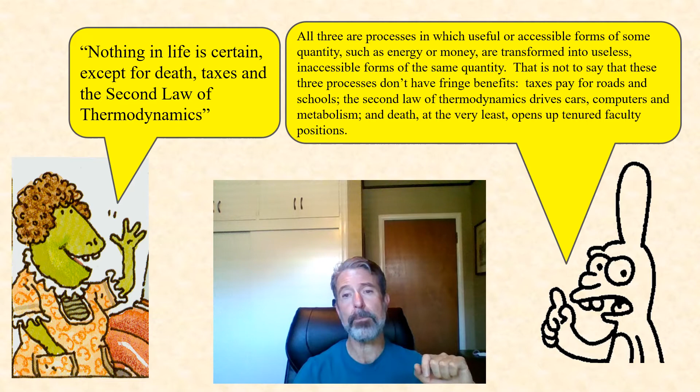So like I said, we will start by reviewing the first law of thermodynamics. Remember, in a previous lecture we said the first law is really nothing more than a restatement of the law of conservation of energy, for thermodynamic systems.

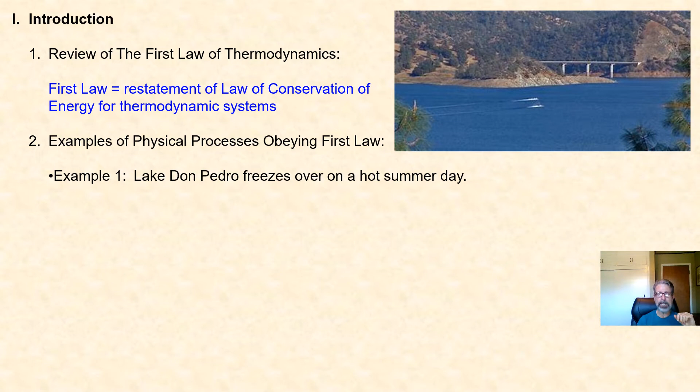Let's take a look at some examples of physical processes that obey the first law of thermodynamics: like Lake Don Pedro freezing over on a hot summer day, or a test tube that you drop spontaneously reassembling itself and rising upwards into your hand unbroken. Or how about this one: your messy bedroom spontaneously rearranges itself into a paragon of order.

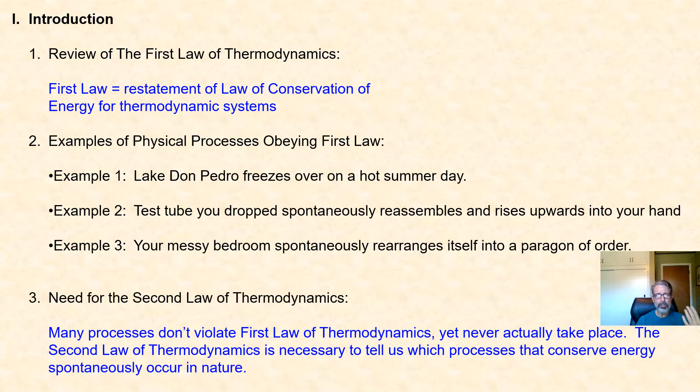So you're starting to see a little bit of the problem, and why we need the second law of thermodynamics. None of these processes described in these three examples violate the first law. They are all consistent with it in that energy would be conserved in every single one of those processes, yet they never actually take place. The second law of thermodynamics is necessary to tell us which processes that conserve energy spontaneously occur in nature.

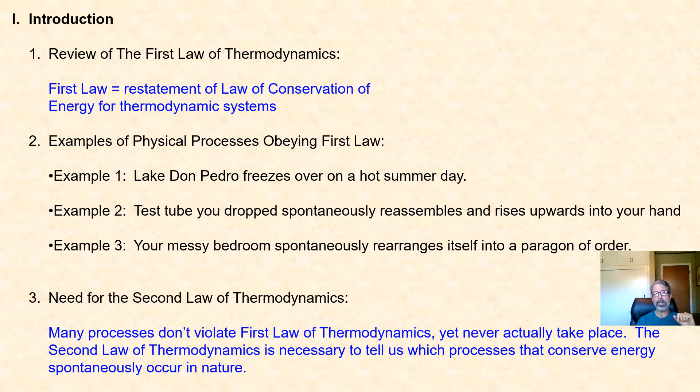As I was saying, one of the ways in which the second law has been stated, one of the first ways, was in terms of heat engines. Heat engines in the mid-1800s were a prime focus, kind of as a precursor to the Industrial Revolution. A lot of study was done on them, including from a scientific perspective.

So a heat engine, really by definition, is any device that transforms internal energy or heat into mechanical energy. Said simpler, any device that converts heat into work.

Some examples of heat engines: one we looked at was the thermoelectric converter. If you think about it, this is a simple heat engine that uses the flow of heat from a high temperature reservoir or cup to a low temperature reservoir, and in the process is able to get some work done, which you saw on the fan motor.

Obviously, the internal combustion engine of an automobile is the most common and important example of a heat engine in contemporary society, and we will talk more about those later in this video. And a steam engine, which was another big mover and shaker in the Industrial Revolution, is a device that can convert hot steam into mechanical energy.

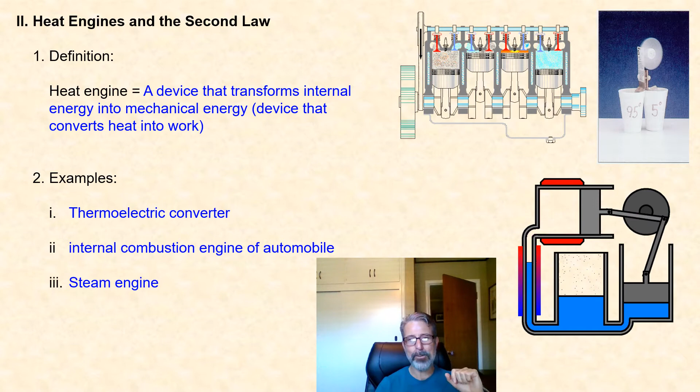So in order to formulate a statement of the second law of thermodynamics in terms of heat engines, we need to start by discussing the thermodynamics of the heat engine. In other words, we need to take a look at what is going on inside of any heat engine in terms of energy flow and work being produced.

Now there are many different forms of heat engines, and I'm showing you an example over here in the right-hand corner of your screen. Whether you're talking about an internal combustion engine, a thermoelectric converter, or a steam engine, the mechanical workings may be quite complicated and different from engine to engine, but the thermodynamics is all the same.

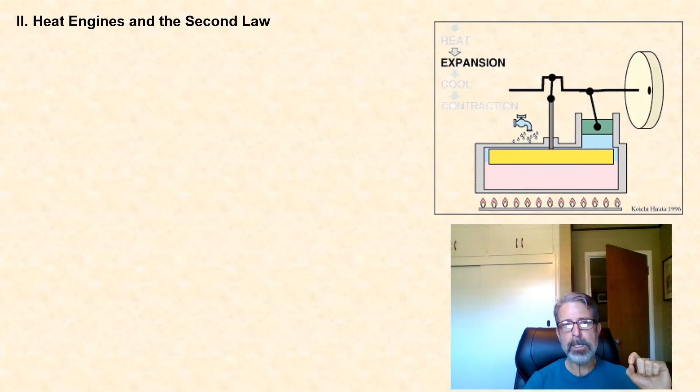So let's start there. Now, if a heat engine is a device that can convert heat into useful work, then we know that heat is really the flow of internal energy. So in order for heat to flow, there must be a temperature gradient.

So what I'm showing you here represents your high temperature reservoir, and this represents your low temperature reservoir. There must be a temperature gradient that exists in order for heat to flow. T sub H represents the high temperature of that reservoir, and T sub C represents the low, or cold, temperature of your lower temperature reservoir.

Now, what we'll put here, this circle represents a system. Whether it's an internal combustion engine, a steam engine, thermoelectric converter, or the silly contraption you see here on the screen, it just represents any heat engine. It represents a system in general.

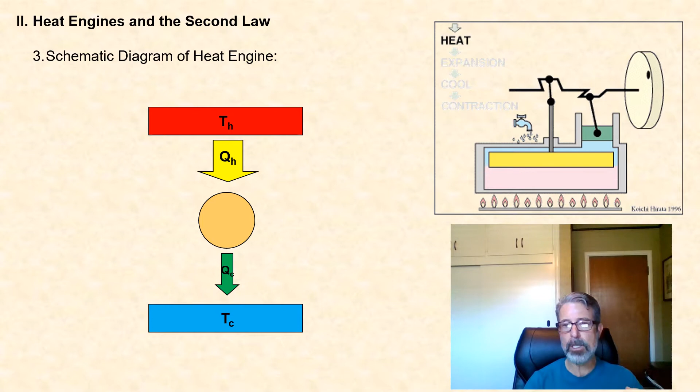Schematically, we can say that in order for any heat engine to work, you must have heat that flows from your high temperature reservoir into your system. This arrow shows Q sub H, representing the amount of heat leaving the high temperature reservoir. Q sub C represents the amount of heat entering the low temperature reservoir. So this is nothing more than heat flow. Notice here that the amount of heat entering the low temperature reservoir is less - that arrow is a little thinner than the amount of heat leaving the high temperature reservoir. Why? Because some of that heat gets converted into doing useful work.

So while this does not tell you how to construct a heat engine, this schematic diagram is true for all heat engines, because this is what they do. They capitalize or exploit the flow of heat from a high temperature reservoir to a low temperature reservoir, and in the process are able to get a certain amount of useful work done.

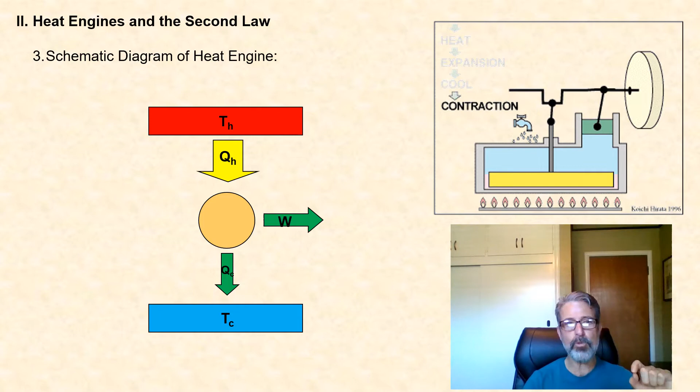So in this slide, we will take a look at the thermodynamics involved in a cyclic process. By cyclic process, we mean any process that begins and ends in the same thermodynamic state. Now, if you look at a thermodynamic process that begins and ends in the same thermodynamic state, when we look at the change in internal energy for any cyclic process, remember that internal energy is a state function, which means it only depends upon the current state of the system. So if our initial and final state are the same state, then by definition there is no change in internal energy for this cycle or cyclic process.

So we want to take a look at the work that gets done in a cyclic process and try to understand something general about the work done for any cyclic process. In order to do that, we'll take a look at a specific example - a particularly easy cycle where we have two isobaric processes as well as two isovolumetric processes, and we want to calculate the net or total work done for each process as well as for the entire cycle.

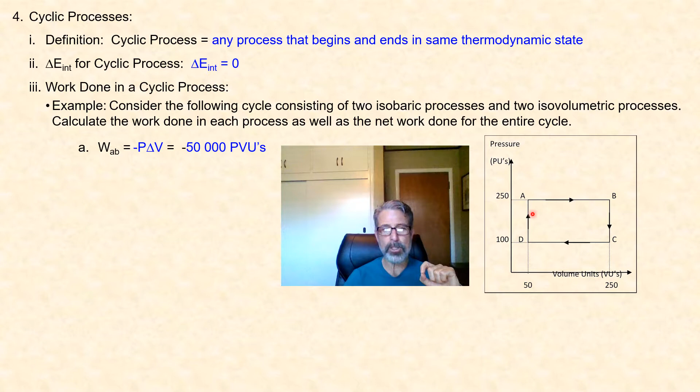So in order to calculate the work, we know two ways. The work done for any process is simply the area under the PV diagram, but in the special case of the isobaric process, the work done on the system is minus the integral of P dV, and since pressure is constant, it's just minus P delta V. From A to B, we have a constant pressure of 250 pressure units. The change in volume, we're going from 50 to 250 volume units. So 250 times 200 gives us an amount of work equal to minus 50,000 pressure volume units.

You can see very clearly that there is no area under the graph from B to C - delta V is 0. There is no change in volume, so there is no work done for that part of the cycle. Going from C back to D, this isobaric compression, the pressure is only 100 pressure units.

Once again, we're going from 250 to 50, so we have a change in volume that is negative 200, times 100 gives us 20,000 pressure volume units. So minus PdV is 20,000.

Once again, going from D to A, there was no change in volume, so there was no work done there. And when we calculate the net or total work done, by adding up the work done in each of these 4 cycles, minus 50,000 plus 20,000 gives us a total work done of negative 30,000 pressure volume units.

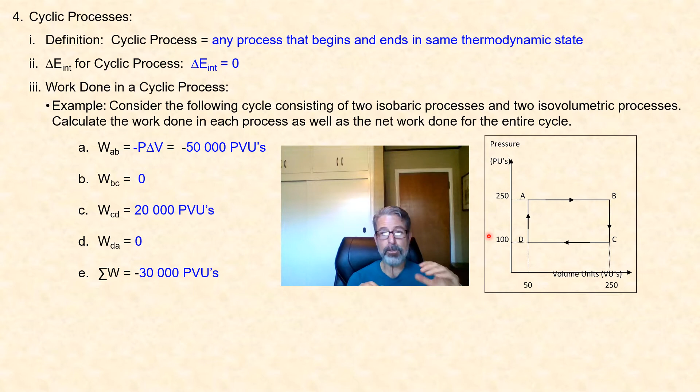So that is done by finding the work done for each of the cycles and then adding up the work terms. But I want to show you here that the net or total work done by the system is simply the area enclosed on this PV diagram.

Notice here, this is the work done by the system on the environment. Whereas the work we're finding here, this is the work that is done on the system by the environment, and that's what that negative sign is all about.

So the area enclosed in this PV diagram is really just the area of this rectangle here, which we can simply find. That's one of the reasons why we looked at these simple processes, because it's an easy area to calculate. So the length of that rectangle times the width.

So our length here is going to be 250 minus 50. Our width, or I guess height, you might call it, is 250 minus 100. And the length times the width gives us 30,000 pressure volume units.

Notice that this is opposite in sign from our answer here, because this is the net work done on the system, that's why we have a negative sign. This is the net work done by the system, which we just showed is exactly equal to the area enclosed on our PV diagram.

General principle here we learned by solving this specific problem. So why, you may be wondering, are we talking about cyclic processes?

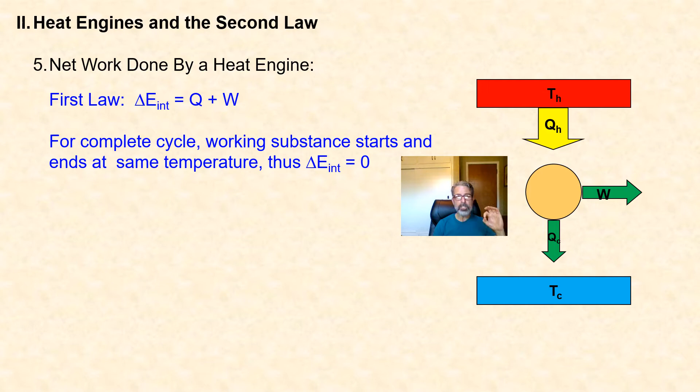Well, it turns out that when we talk about a heat engine, regardless of the type, it is an example of a cyclic process. Because, for a complete cycle, the working substance starts and ends at the same temperature. In which case, we can say that the change in internal energy is 0 for this cyclic process.

You also recall that we said that the internal energy for an ideal gas is directly related to temperature. So if we have a system that begins and ends at the same temperature, for an ideal gas at least, there is no change in internal energy for that system, for that reason as well.

So when we apply the first law of thermodynamics to a heat engine, then we get 0 for the change in internal energy, and we find out that the work that is done on the system is the opposite of the net heat that is added to the system.

When you take a look at your schematic diagram over here, you can see that the net heat added to the system - remember your system is taking in an amount of heat QH from the high temperature reservoir and expelling an amount QC to the low temperature reservoir.

So given that, the net or total heat that gets added to your system is just the difference between those two heats, that is QH minus QC. In which case, we can say that the work that is done on the system is the opposite of QH minus QC.

And you remember me telling you a long time ago that the way the first law of thermodynamics was initially stated, it was stated as a result of work that was done on heat engines, in which case there was a sign when we talked about the first law - we stated it as Q minus W, because W was defined to be the work done by the system, not on the system. In fact, your textbook, until about 5 years ago, stated the first law of thermodynamics this way.

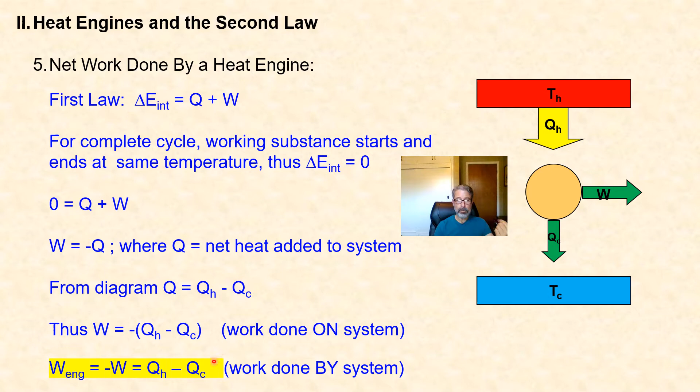So we will very often, when we talk about the second law of thermodynamics in terms of heat engines, put here work, engine, that this is the work that is done by the system, because that's what heat engines are used for. They're used to do useful work, to convert heat into useful work. So the work that you get out of your engine is a positive number, because it is work that the engine can do on the environment. It is simply the difference between the heat added from the high temperature reservoir and the heat expelled to the low temperature reservoir.

So how do you measure the efficiency of a heat engine? Before we talk about heat engines specifically, let's just talk about the efficiency of any machine. A machine is giving you some quantity out. In our case, for a heat engine, it's useful work. But regardless of the machine you're talking about, you put something into the machine, you get something out.

Efficiency in general will be a measure of what you get out compared to what you put in. So when we talk about a heat engine, it's work and energy that we're talking about. We can talk about the efficiency of a heat engine as being a measure of the useful work that you get out of your engine, done by the system on the environment, compared to the amount of heat, the net heat that gets added to your system. That's your input.

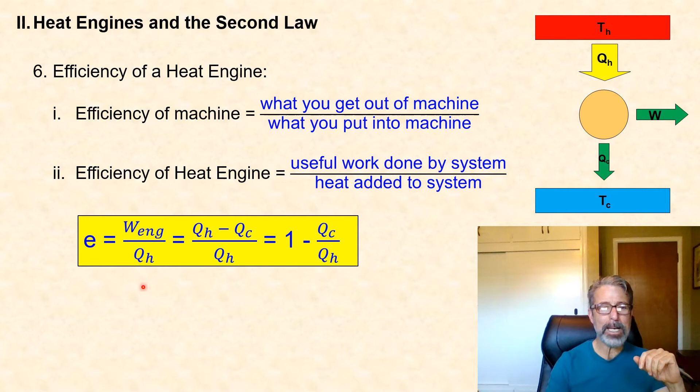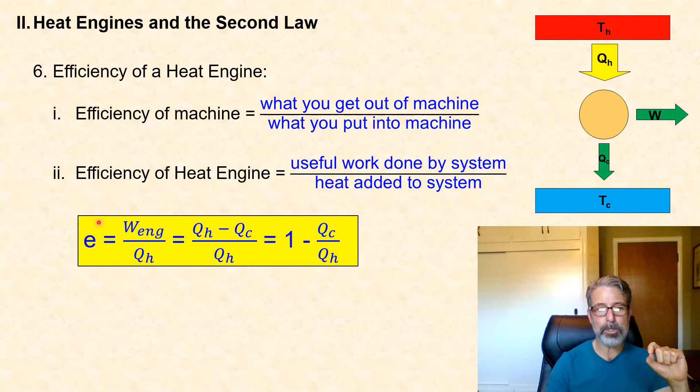Since we have expressions derived for this previously, remember we said that the work done by the system on the environment, the work you get out of your engine, is just the difference between the amount of heat added from the high temperature reservoir and the amount of heat expelled to the low temperature reservoir. The heat that gets added to the system is Q high. When we simplify this, Q high minus QC over Q high, we can write it a little differently using some algebra. This is an expression that represents the efficiency of any heat engine.

So I will put this up from the previous slide. When we take a look at the efficiency of a heat engine, we see clearly from this definition that if you want to increase the efficiency of your heat engine, it's this ratio of QC to Q high that you have to work on. As that ratio gets smaller, the efficiency gets closer to 1, or converting it to a percent, 100%. So making QC as small as possible compared to the amount of heat taken in from the high temperature reservoir, the smaller the amount of heat expelled to the low temperature reservoir, the more efficient your engine.

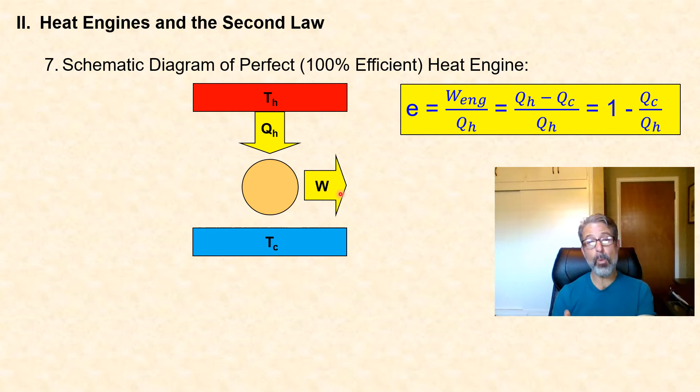Remember we said that one of the ways of stating the second law of thermodynamics is in terms of heat engines, and this is a statement of it: there is no such thing as a 100% efficient heat engine. In other words, there is no device that can convert a given amount of heat completely into useful work. There will always be expulsion of waste heat to your low temperature reservoir, so that Q sub C will never be zero.

So when you look at a physical law like this, notice that this is not derived from any previous principles. This is just a statement of reality, based on observations, based on experiments performed by scientists. We think of this as an observational law that you cannot have a 100% efficient heat engine. You must always have this transfer of waste heat to the low temperature reservoir.

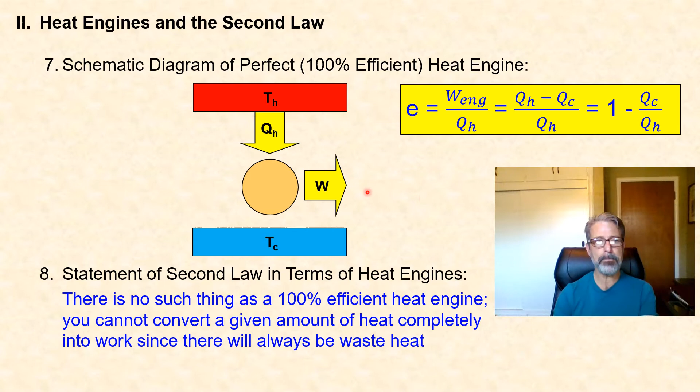A schematic diagram of a heat engine does leave a little bit out about reality. So in this slide, we'll take a look at a specific example of a heat engine that is quite important to us, the internal combustion engine, and answer some qualitative questions.

What is the typical efficiency of an automobile's internal combustion engine? Many of you may know the answer already, but if not, you may be a little surprised. A typical internal combustion engine is only about 20% efficient.

Diesel engines achieve much greater efficiency because of their high compression ratio. This 20% is a typical efficiency. I happen to drive a car with a fairly high compression ratio, so its efficiency is much greater than 20%, but that result may be surprising if you didn't already know it.

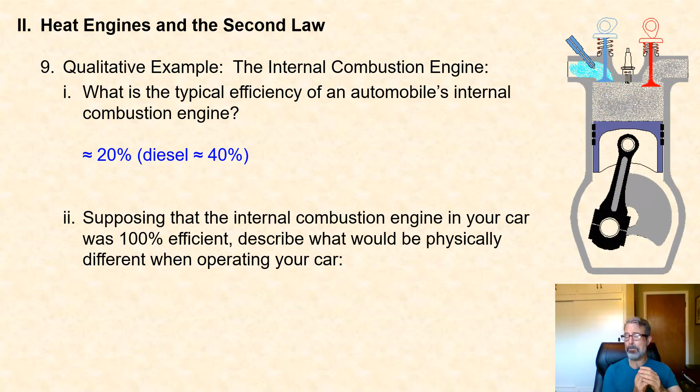Suppose the internal combustion engine in your car was 100% efficient. What would be physically different when operating your car? Well, you would get much better gas mileage, about 5 times better for a typical car, since all the heat extracted from the high temperature reservoir would go into useful work.

Another important difference: you would have no need for a cooling system in your car, because your engine would never heat up. If you're not extracting any waste heat to a low temperature reservoir, if all the heat taken in by the engine was converted into useful work, there would be no waste heat and no need to cool your engine, because it wouldn't exist.

So in a sense, with no exhaust heat, your engine would also be producing no thermal pollution to the environment, which would greatly help in the fight against global warming.

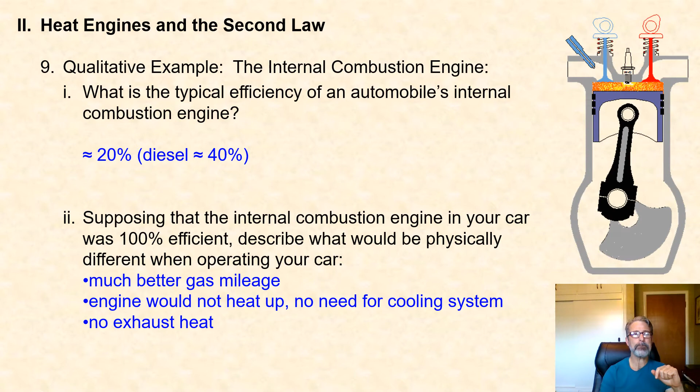Another way to state the second law of thermodynamics is in terms of heat pumps and refrigerators. We will see that a heat pump or refrigerator is intimately related to the heat engine. Let's start by defining what we mean by a heat pump.

A heat pump is really any device that transfers heat from a low temperature environment or reservoir to a higher temperature environment or reservoir.

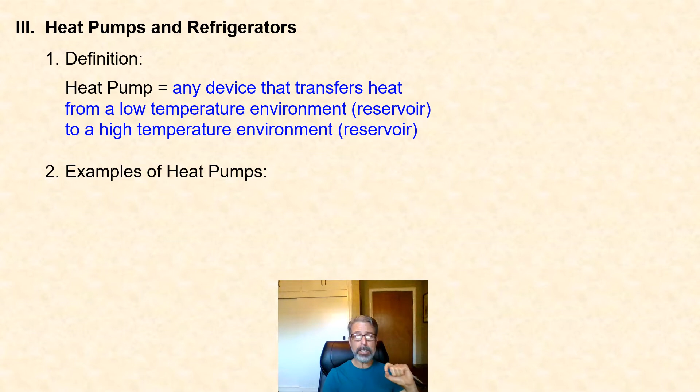Examples of real heat pumps used in society: certainly the refrigerator is an example of a heat pump, transferring heat from the low temperature environment inside your refrigerator to the higher temperature environment of your room.

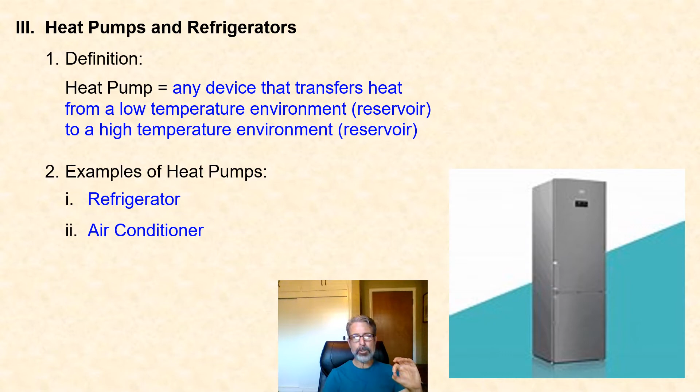An air conditioner is another example of a heat pump, transferring heat from a low temperature environment to a high temperature environment. Many home heating systems use heat pumps too. This is not the only way, but it is one of the ways houses can be heated.

We will talk about, in the next slide, how to represent these schematically, and we will come up with a statement of the second law in terms of heat pumps.

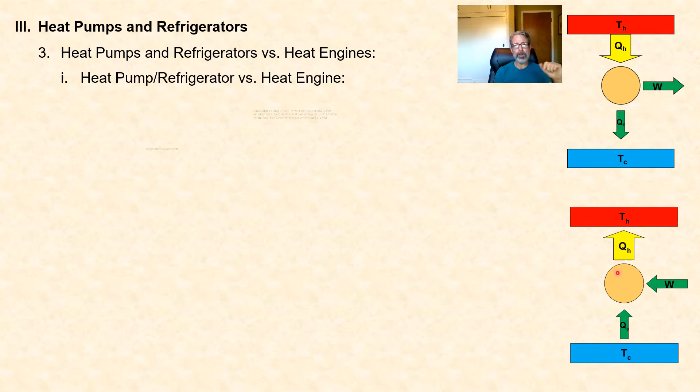So the heat pump or refrigerator versus the heat engine: a heat engine converts heat into work by allowing heat to flow naturally from the high temperature reservoir to the low temperature reservoir, while a heat pump or refrigerator uses work to transfer heat from a low temperature environment to a high temperature environment.

So what makes a heat pump different from a refrigerator? It's really a question of perspective on what you want to use it for. Most households that use heat pumps will use one to heat the house, and they will also use that same heat pump, turned to a different setting, to cool the house.

So it really is a question of what is inside versus outside. A heat pump is really nothing more than a refrigerator turned inside out, such that you're just exchanging the inside for the outside. A refrigerator transfers heat from the cold temperature environment, that is heat from inside the refrigerator, to the higher temperature environment of the room by placing the evaporator coils inside the refrigerator.

While the condenser coils are located outside the refrigerator. A heat pump is exactly the same device, but it is transferring heat from the cold temperature environment, let's say outside of the building, to the high temperature environment, which is inside of your house. So the evaporator coils are located outside of the building, while the condenser coils are located inside the building.

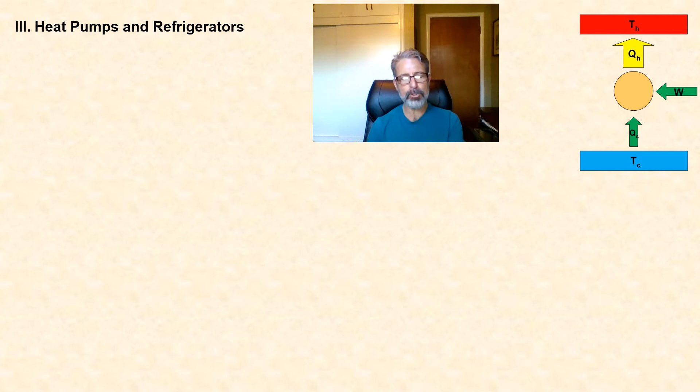So let's start by applying the first law to a heat pump. And remember, a heat pump, a refrigerator, it's the same device. It's just a question of what you're using it for. When we apply the first law, just like for heat engines, a heat pump or refrigerator involves a cyclic process where our system begins and ends in the same state.

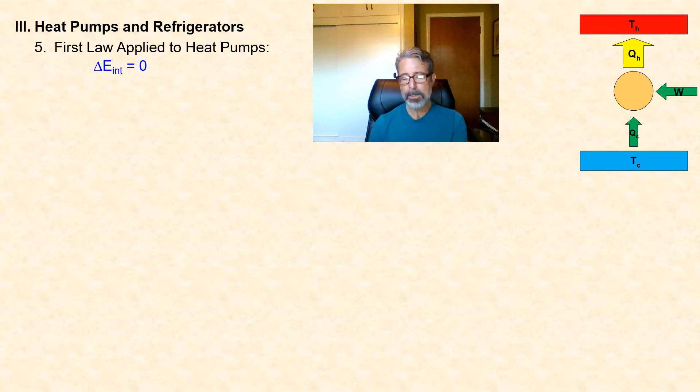So we can once again say that the change in the internal energy of our system, of our heat pump or refrigerator, must be zero, which is true for any process that begins and ends in the same state. In which case, change in internal energy is equal to the heat that gets added to the system, plus the work that's done on our system, so that must equal zero.

And here, when we look at it, the net heat added, remember your system, your heat pump, takes in an amount of heat QC from the low temperature reservoir and expels a greater amount of heat QH to the high temperature reservoir. So the net heat added is the difference here in this order, QC minus QH.

The work done on the system is W, right? You've got to put work into this machine to be able to unnaturally transfer heat from the low temperature reservoir to the high temperature reservoir.

So here we can solve this for work, and we find out that work is just the difference between QH and QC. In other words, an amount of work is done on the system that is equal to the difference between the heat expelled to the high temperature reservoir, which is the greater amount of heat, minus what heat is withdrawn from the low temperature reservoir. So here you see this term will always be positive, telling us that you have to do work on the system to make this unnatural process happen.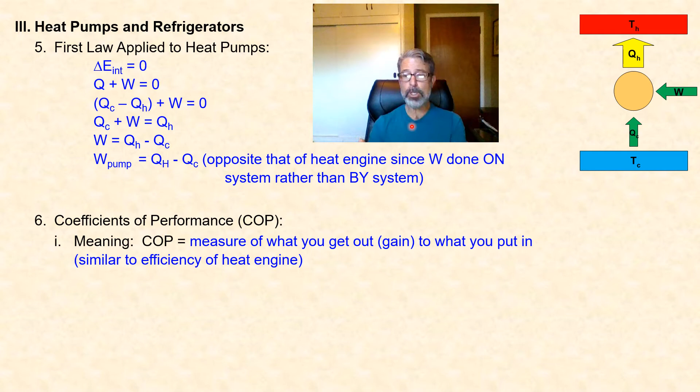The coefficient of performance depends on whether you're using the heat pump in its heating mode or cooling mode. So there's really two ways to measure it, and you've got to measure it based on what you want to get out.

If you're using a heat pump in its cooling mode, let's call that an air conditioner, your goal then is to remove energy or heat from the low temperature reservoir. The gain is what we're trying to do: remove heat from your room at a low temperature.

So QC is really a measure of what you get out, how much heat you're able to remove from your room, compared to what you got to put in, which is work. This ratio QC to W is a measure of your coefficient of performance, kind of like efficiency, when your heat pump is in its cooling mode.

When you have your heat pump in its heating mode, ask the question: what are you trying to get out? Well, in this case, your goal is to actually use it to heat your room. So your gain is really measured by the amount of heat that gets transferred into your high temperature environment, Q high, compared to what you have to put into your system, your machine, which is always work.

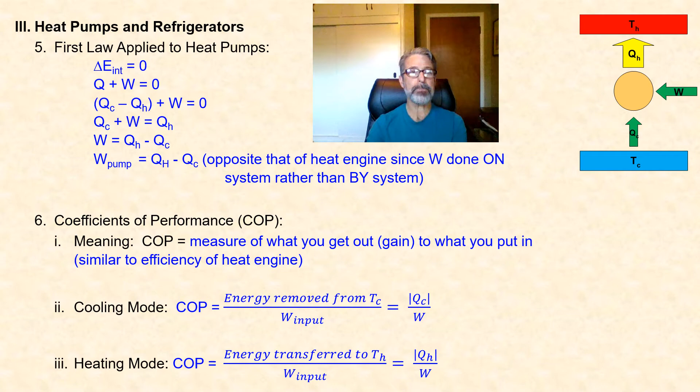In this slide, we will take a look at a specific example which will not only help us see some of the differences between a heat pump in its heating mode and cooling mode, but I think you're going to learn something that might surprise you about the efficiency of a typical heat pump. In this example, we're told that a heat pump is used to heat a house in a moderate climate by using an electric motor to pump heat from the cold outside to the warm inside of the house. This is what heat pumps do in their heating mode.

The heat pump has a coefficient of performance of 3.0 and is rated to do work at 1500 watts, in other words, 1500 joules of energy transferred per second. Assume that the motor running the heat pump is 100% efficient, which of course is not true, but it'll make calculating this a little bit easier.

First we're asked to calculate the quantity of heat added to the room each second. So we need to use our definition for the coefficient of performance for the heat pump in its heating mode. Remember, it's a measure of the heat transferred from your device to the high temperature environment, Q high, divided by the work that your pump must actually do to make this unnatural process happen. So here we want to find in the problem what Q high is, that amount of heat that gets transferred.

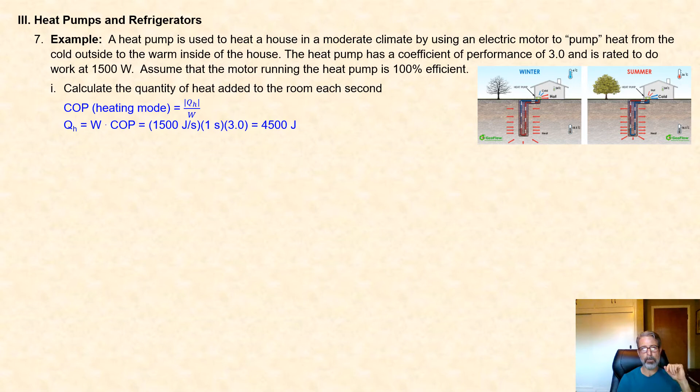This tells us that in 1 second, 4500 joules of heat is transferred from our low temperature reservoir to our high temperature reservoir. Now, that may not seem so surprising, but we'll take a look at this follow-up problem here.

We'll take a look at another type of home heating system, which is just your electric heater, which you plug into a wall receptacle. And if it is a 1500 watt heater...

If the conversion of electrical energy into thermal energy via an electric heater is 100% efficient, which it is, and you can convert a given amount of electrical energy, or work, 100% into heat, which device should you choose to most efficiently heat your home? Explain. Well, your answer is right here.

A 1500 watt heater will provide you with 1500 joules of heat per second. But compare that to the 4500 joules of heat per second you get with your heat pump. So think about it.

When the electric heater is plugged into the wall, it draws 1500 watts of electrical energy per second and delivers 1500 watts of electrical heat per second to the room. The heat pump also draws 1500 watts of electrical energy from the power company in order to operate the pump, but it delivers 4500 watts, or joules per second, of heat to the room.

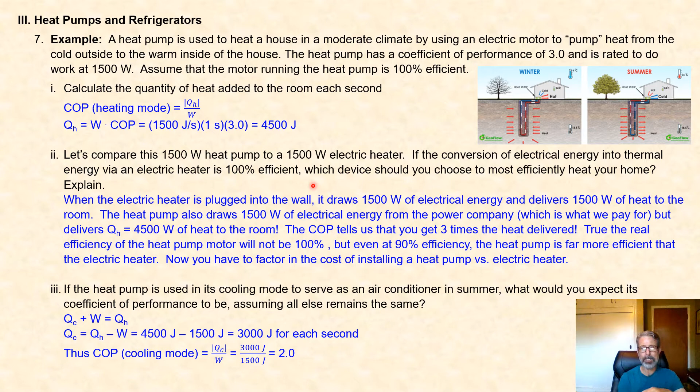A schematic diagram is one thing, but what is the physical mechanism by which this unnatural heat transfer from a low temperature environment to a high temperature environment takes place? How is this actually accomplished? Let's spend a few minutes looking at either a refrigerator or an AC unit.

Since the temperature goes up and these condenser coils are now at a higher temperature than the room temperature environment, heat is now released into the environment. As heat is released, this gaseous coolant cools, and in the process it condenses back into a liquid.

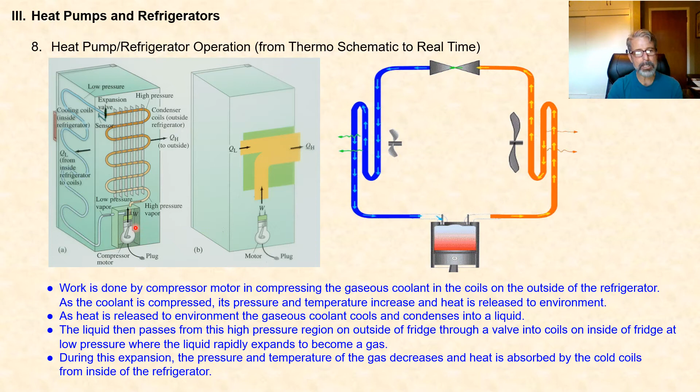This rapid expansion of the liquid allows it to become a gas. During this expansion, the pressure and temperature of the gas decrease, so that these coils can absorb heat from inside the refrigerator. This cycle then will repeat - that low pressure vapor is returned to your compressor, in which case it will be compressed again, and the cycle will repeat.

We're going to take a look at two of the ways in which Clausius stated thermodynamics. In our next video when we talk about entropy, he was also the first person to define or describe this concept from the macroscopic point of view. It was really Boltzmann, studying statistical mechanics and kinetic molecular theory, who gave entropy a microscopic understanding. But Clausius was a rather important figure in the development of thermodynamics.

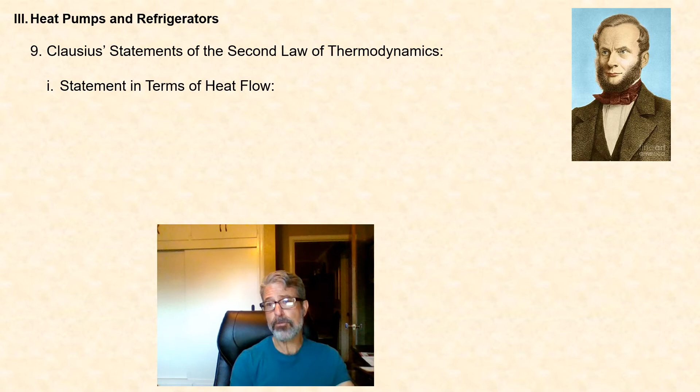We're going to come up with two statements of the second law that he described - the first one in terms of heat flow. He says that heat does not flow spontaneously from a cold object to a hot object. We can see that in our discussion of heat pumps and refrigerators, that it takes some work to make this happen.

So this is one statement, and we can state the same basic concept in terms of a heat pump or refrigerator like this: there's no such thing as a perfect refrigerator or heat pump. Some work must be done in order to transfer energy from a low temperature environment to a high temperature environment.

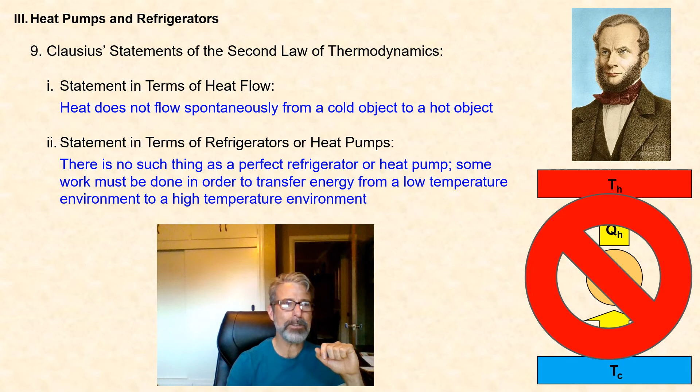So in order for us to talk about the Carnot cycle later in this video, as well as the concept of entropy in the next video, we need to talk about the meaning of a reversible process as opposed to an irreversible process. So what is the criteria for a process to be considered reversible? Let's take a look. There's two criteria.

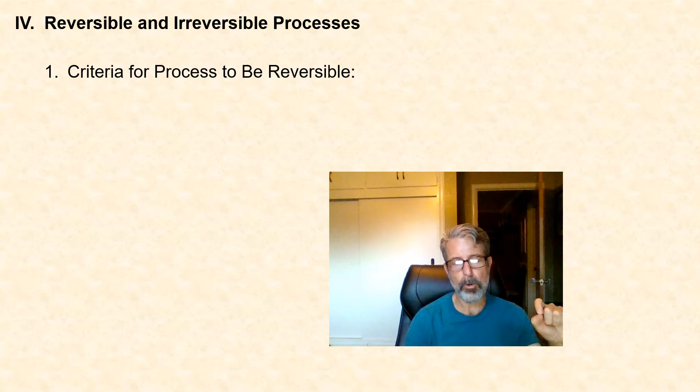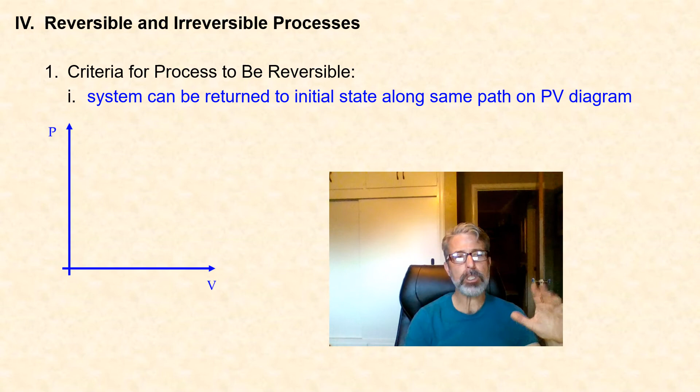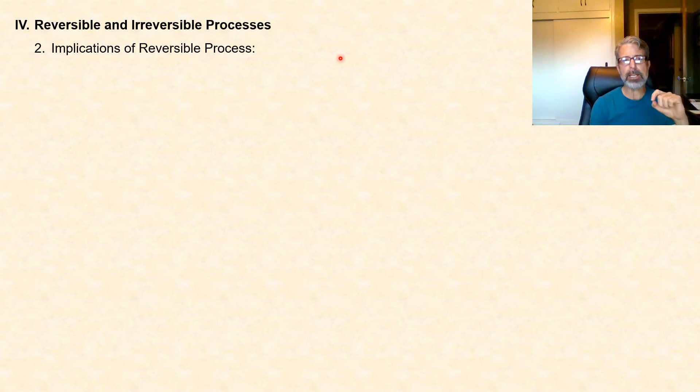So what are the implications of having a reversible process? What are the implications in terms of heat exchange and work being done? If you had a reversible process, the heat exchange between the system and environment would be exactly the same in the forward direction as in the reverse direction. The signs would be different, but the magnitude of that amount of heat would be the same.

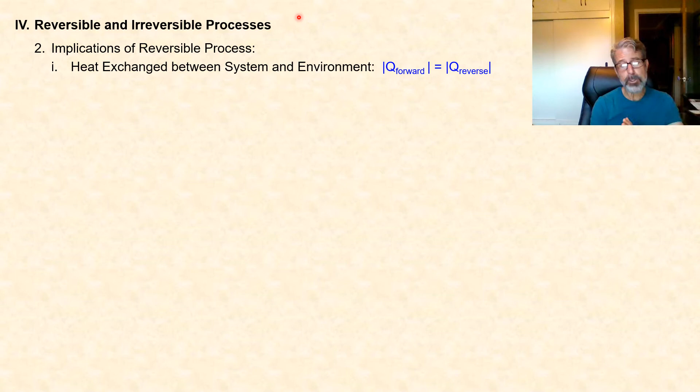In other words, if heat was given off by your system in the forward direction, the same amount of heat would be absorbed by your system in the reverse direction. The same can be said about work: if you had a given amount of work done by your system on the environment in the forward direction, you'd have the same amount of work done on your system by the environment in the reverse direction. Same magnitude in the forward and reverse direction, but the signs would be different.

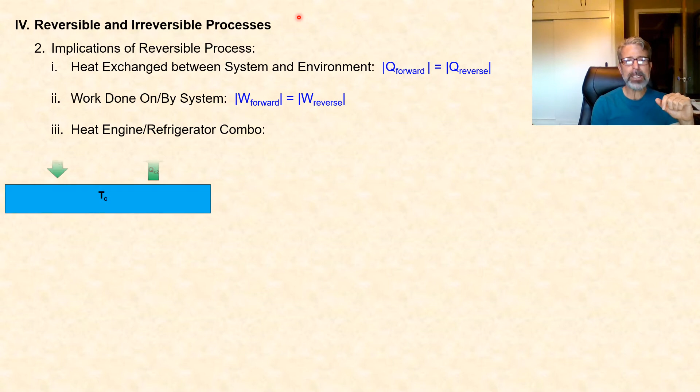One of the best ways to see these implications is by considering this idealized, imaginary situation we call the heat engine refrigerator combo. We could draw it schematically like this. What if you had a heat engine, shown here on your left, and used the work produced by the heat engine to actually drive a refrigerator? What would the implications be if you had a reversible process here?

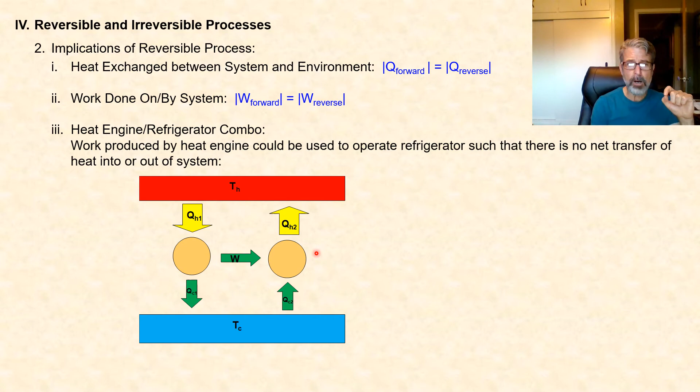The work produced by the heat engine could be used to operate a refrigerator such that there is no net transfer of heat into or out of the system. So if your system in the heat engine portion of the machine extracted an amount of heat QH1 from the high temperature reservoir, notice that in the refrigerator heat pump portion of the system, that exact same amount of heat would be returned to the high temperature reservoir. In other words, QH1 would exactly equal QH2.

We can say the same thing here: the amount of heat transferred to your low temperature reservoir in the heat engine portion of the system would exactly equal the amount of heat transferred from the low temperature reservoir in the cooling, or heat pump, portion of the system.

So QC1 would be exactly equal to QC2. Given that, this system could operate where there really would be absolutely no net transfer of heat into or out of the system.

Given this situation, the world would look exactly the same before the process as it would after. The big picture: when the process occurs, the system and environment change. But for a reversible process, when the process is returned to its original state, there would be no evidence of any change in the system or the environment.

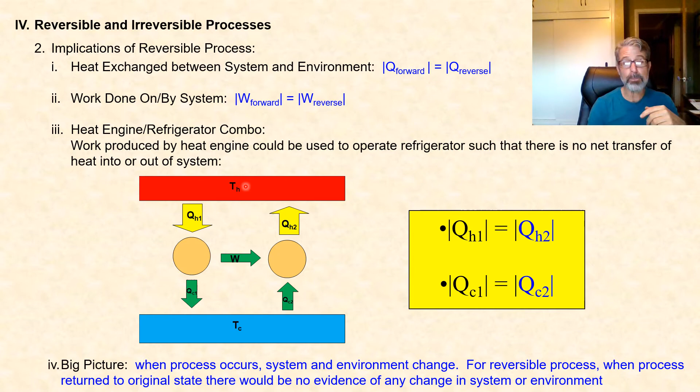That's because there would be no net transfer of heat, so there would be absolutely no knowledge of this process having taken place in the first place.

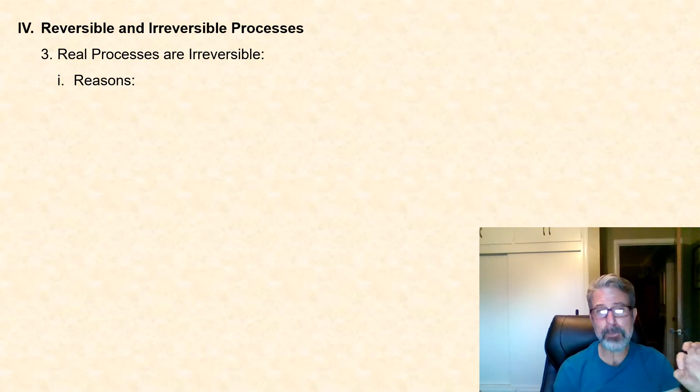So, as you are probably imagining, real processes are irreversible. Why is that? Well, really two reasons. The two criteria we talked about for a process to be reversible are impossibilities.

First, friction. Because of the presence of friction, a process can never retrace itself on a PV diagram, since work must be done to overcome friction. There is no way that the work done in the forward direction could ever be exactly the same size or magnitude as the work done for the reverse process.

Think about this: there's no such thing as a 100% efficient heat engine. You can take a given amount of work and completely convert it into heat—try it, rub your hands together. All that work goes into the conversion of thermal energy or heat. But you can never take a given amount of heat and convert it completely back into work in the opposite direction.

The second reason real processes are irreversible has to do with our second condition: that at all points along the PV diagram, our system must be in a state of equilibrium at all times, for both the forward and reverse process.

This could only happen if the process occurred infinitely slowly. Since no process can occur infinitely slowly, no real process can be perpetually in equilibrium at all times. So, no big surprise, real processes are irreversible.

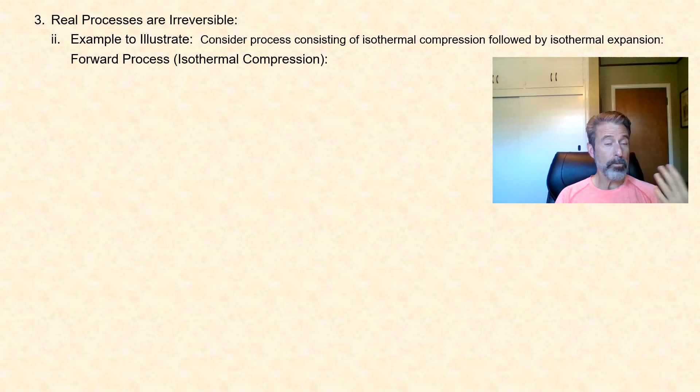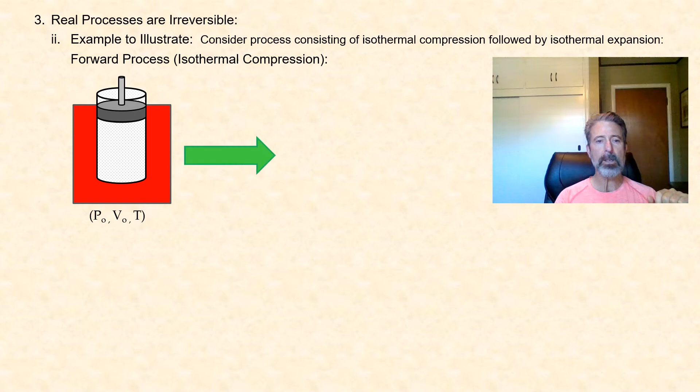The forward process will be the isothermal compression. Suppose we have our system, a gas contained in a cylinder fitted with a piston, starting at some initial pressure, initial volume, and temperature. During this compression, work is done to compress the gas by moving the piston downwards, so the system ends up at some final pressure, final volume, and the same temperature, since this is an isothermal process.

Making up some numbers, let's suppose we do 10 joules of work in compressing the gas, and the system loses or expels 10 joules of heat to the environment.

Now let's look at the reverse process, the isothermal expansion. Suppose our initial pressure, volume, and temperature here are really the final pressure, volume, and temperature of the previous compression process. Let's suppose we allow our gas to expand and do some work on the environment, ending up at some final pressure, final volume, and the same temperature.

In this case, if our system absorbs 10 joules of heat from the environment, we find that the work it can do is not going to be equal to 10 joules. In other words, the work done by the system on the environment cannot equal 10 joules. Why? Because friction between the piston and cylinder exists, so not all of the heat absorbed will get converted into useful work.

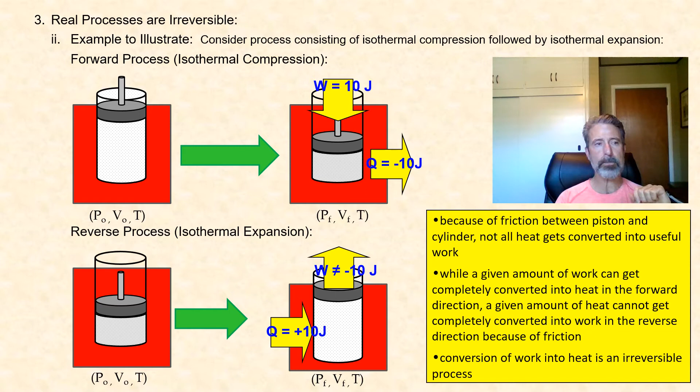So the last topic we'll talk about today has to do with the work of the French scientist and engineer Carnot. We'll talk about the Carnot engine, the Carnot cycle, and Carnot's theorem.

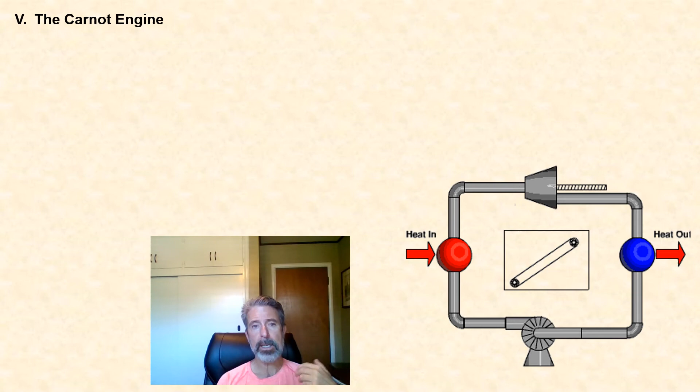Starting with the Carnot engine, what is a Carnot engine? It is an imaginary, theoretical heat engine that sets the upper limit to the efficiency of any real heat engine.

A Carnot engine operates through a reversible cycle. Since no real cycle can be reversible, you can imagine how this particular reversible cycle would be the limiting case. It would set a limit to the efficiency of any heat engine operating through a real irreversible cycle.

This reversible cycle is what we call the Carnot cycle, and we'll talk about that in an upcoming slide.

Carnot's theorem basically says what we said above: that no real heat engine operating between two energy reservoirs can ever be more efficient than a Carnot engine operating between these same two reservoirs. Stated without proof here, and to really understand what this means, we need to talk about the Carnot cycle, which we will talk about shortly.

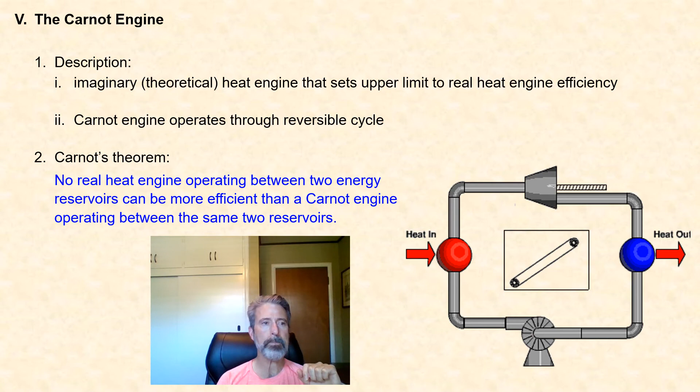In this slide, we will talk about each of the four processes involved in the Carnot cycle. First of all, the Carnot cycle involves a very specific system. We're talking about an ideal gas being our working substance.

This ideal gas will exist inside of a cylinder that is fitted with a piston, so it will be allowed to expand and contract because of the presence of the piston. The Carnot cycle consists of four processes that follow each other: an isothermal expansion, followed by an adiabatic expansion, followed by an isothermal compression, and finally an adiabatic compression.

Let's talk about what's going on in our system for each of these processes, and then we'll apply the first law of thermodynamics so we can get an idea of what's happening in terms of the internal energy of our system, the heat exchange between system and environment, as well as the work that either is done on or by our system.

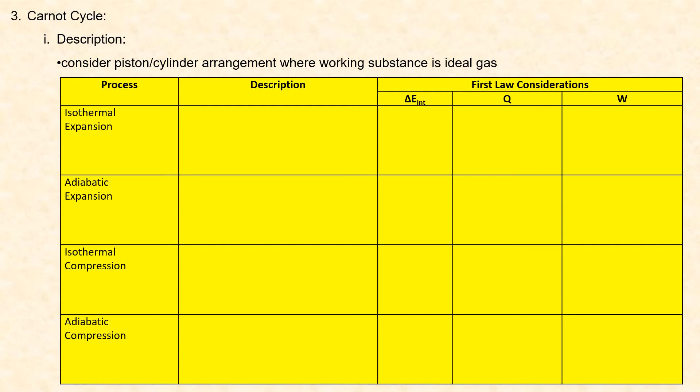Starting with the isothermal expansion, the gas in the cylinder is placed in contact with a high temperature heat reservoir, so that the gas can absorb heat from the reservoir, and in doing so will expand and do some work in moving the piston outwards. This takes place at a constant temperature - it's an isothermal process - the gas absorbs heat from this high temperature reservoir, expands against the piston, and does some work in the process.

So the change in the internal energy of our system is zero. Remember that for an ideal gas, the internal energy is linearly proportional to the temperature. So if there is no change in temperature, by definition of isothermal expansion, there will be no change in internal energy - so that is zero.

Now the heat here we'll symbolize for this part of the process as Q sub high, because heat is being absorbed by our system, by the gas in contact with that high temperature reservoir. So when we add heat to the system, the sign of Q is positive according to our sign conventions. And when we apply the first law, we find out that the work done is minus Q high.

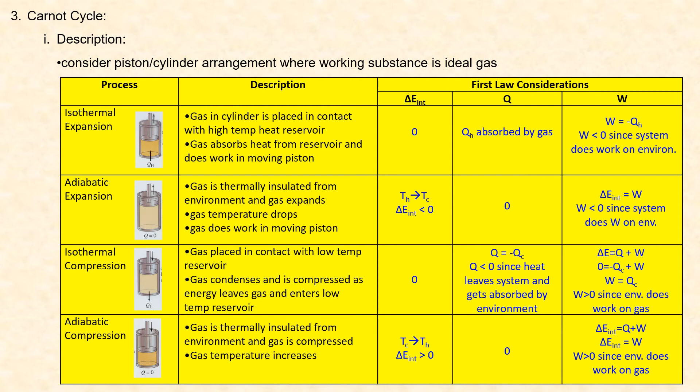So these are the 4 processes involved in the Carnot cycle. In the next slide, we'll take a look at what this represents on a PV diagram.

In this slide, we'll take a look at what these 4 processes look like on a PV diagram. You may want to replay this slide a couple of times, because we'll take a look at a simulation that shows what's actually happening in our system and how that can be graphed on the PV diagram. Let me get myself a laser pointer here. All right, here we go.

High temperature reservoir in contact with our gas. It expands - that is the isothermal expansion. Insulated, the adiabatic expansion. Now we place it in contact with a low temperature reservoir, do some work on the system to compress it, and now we adiabatically compress it even more. This happens pretty quickly here: isothermal expansion, adiabatic expansion, isothermal compression, followed by the adiabatic compression.

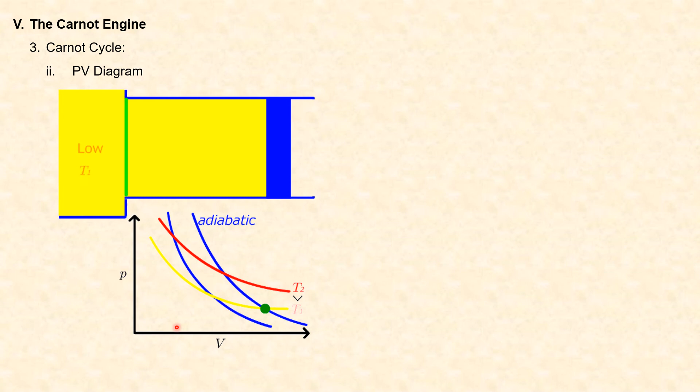So you can see that in the expansions, we get work done by our system on the environment, whereas in the compressions, we have to do work on the system. In other words, the environment does work on the system to bring about the compression.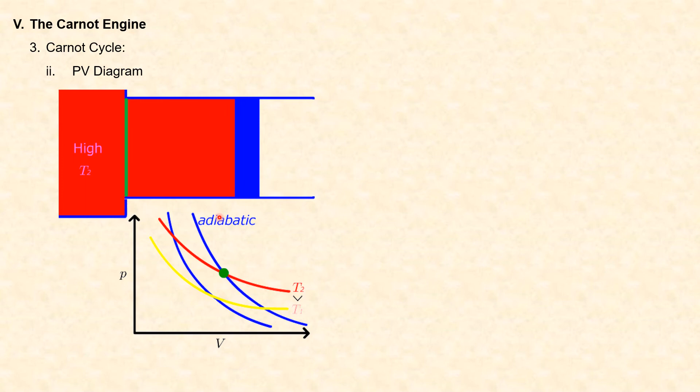So if we take a look at what this looks like on a PV diagram, here we have it. You see, if we start over here at point A, we've got the isothermal expansion, followed by the adiabatic expansion, followed by the isothermal compression, followed by the adiabatic compression.

During that isothermal expansion, heat is absorbed from the high temperature reservoir, an amount we'll call Q high, and during the isothermal compression, an amount of heat QC is now expelled or released to the low temperature reservoir.

So how much work gets done during the Carnot cycle? Remember, we said that for the two expansions, the isothermal expansion followed by the adiabatic expansion, the system does work on the environment. So that's, by our sign conventions, defined to be negative work. Whereas for the two compressions, the isothermal compression followed by the adiabatic compression, we get positive work done on the system as the gas is compressed.

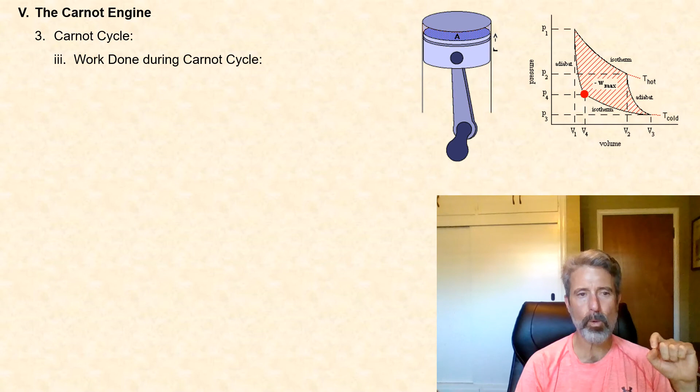So we get two processes giving us positive work, two processes giving us negative work. What is the overall result? Let's take a look.

Graphically speaking, and we looked at this before, the work done by the system will be equal to the area enclosed by the cycle. So what you see here with this red area, the area enclosed there, represents the work that is done by the system on the environment. And you see here we have a positive area here, so this does tell us that work gets done by the system on the environment.

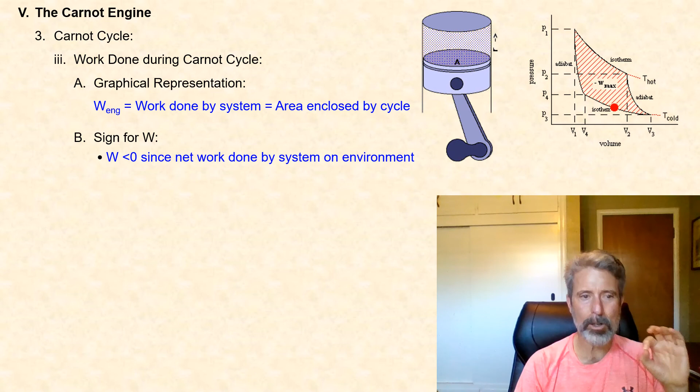So when it comes to the sign for work, the total work will be less than zero, will be negative, since net work is being done by the system on the environment, and by our sign conventions, we define that work to be negative. This tells you then that the work done by the system during the expansion phases, because that's the negative work, must exceed the total work done on the system during the compression phases, because that's positive work. So overall, when we look at the net or total work done, the system does work on the environment.

And if we want to look at a quantitative expression for this, and this is going to look familiar to you, we'll take a look at what the first law has to say about this. Remember that for any complete cycle, the change in the internal energy is zero. If we start and end in the same state, internal energy being a state function, that must be the case.

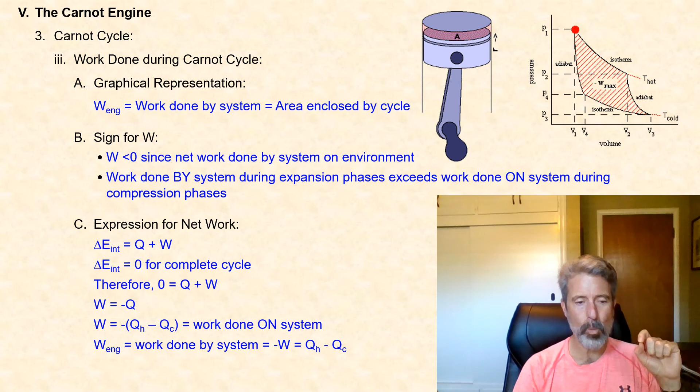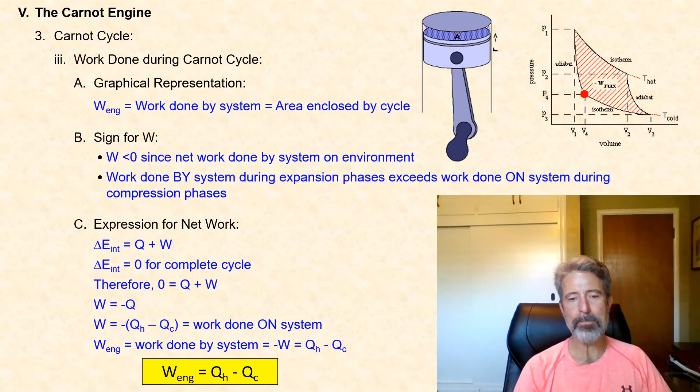So the first law looks like this, telling us that the net work is the opposite of the net heat that gets added. When it comes to the heat exchanged, Q sub H, Q high, is taken in, added to our system from the high temperature reservoir, and Q sub C is expelled or leaves our system to the low temperature reservoir, so we define that heat to be negative. In which case, we can say the work engine, that is the work done by the system on the environment, is just the difference between the heat taken in and the heat expelled. So that tells us that the work engine is a positive quantity, and we've seen this before.

So what about the efficiency of the Carnot engine? Well, we can use the expressions we derive for heat engines in general and come up with an expression for efficiency here with one caveat, which we'll talk about here.

So in terms of heat, recall we said that the efficiency of any heat engine is the work that we get out of the engine, the work that the engine can do, the system can do on the environment. It's what you get out divided by what you put in, which is the heat being absorbed from the high temperature reservoir. We showed that the output work is equal to the difference between the heat that is absorbed from the high temperature reservoir and the heat that is expelled to the low temperature reservoir. So this expression should look very familiar.

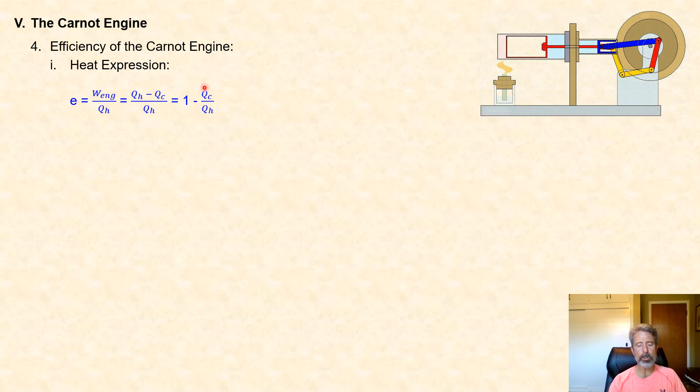Now, this is true for the Carnot engine. If you have a problem where you know how much heat is absorbed by your system and how much heat is expelled into the low temperature reservoir, then this will do.

There's also a relationship between heats absorbed and expelled and the temperatures of these reservoirs, which is only true for the Carnot cycle. I'm going to state this without proof—if you want to see where this comes from, take a look at your text for the derivation. But this ratio of heat expelled to the low temperature reservoir, to heat absorbed from the high temperature reservoir, is exactly equal to the temperature ratio of the low temperature reservoir to the high temperature reservoir. So this is only true for the Carnot engine, not for any real heat engine.

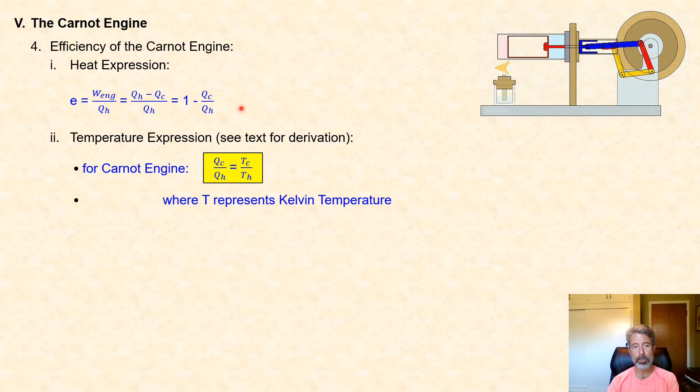So when we substitute this into our expression for efficiency, we can also get an expression for efficiency in terms of temperatures. So, 1 minus QC over Q high is equal to 1 minus TC over T high, using that ratio. Remember, this is only true for a Carnot engine, not for real heat engines, where we do not have a reversible cycle.

As always, remember that T is a thermodynamic temperature. So anytime you're doing a problem here, you must make sure that your temperatures are Kelvin temperatures.

So in looking at this, we can ask the question: what would be ways to actually increase the efficiency of not just a Carnot engine, but really any engine in general? If you were to devise an engine, what could you do to make it run more efficiently? When you take a look at this expression, it tells us that you can do really two things: you can increase the temperature of the high temperature reservoir, or you can decrease the temperature of the low temperature reservoir.

Now, the truth is the low temperature reservoir for a real heat engine will be determined by the environmental temperature. So in theory, your car may run a little more efficiently in the wintertime when the outside temperature is colder, because you're increasing the temperature gradient between your engine and the environment, when your engine is warm, of course, not when it's cold. But basically, you don't have a lot of control over the cold temperature reservoir because that's the temperature of the environment.

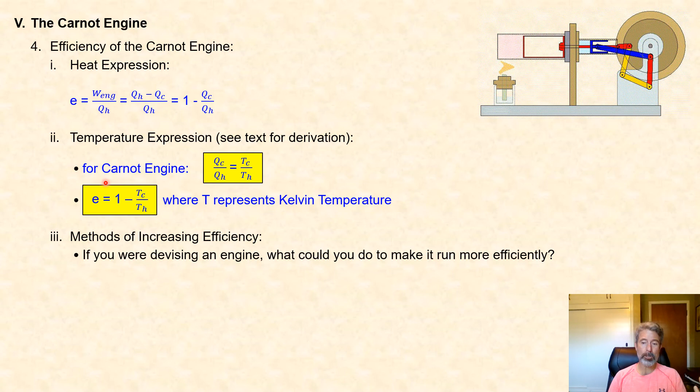But increasing the temperature of the high temperature reservoir—this is something that is used in technology to increase efficiencies. One of the reasons why diesel engines run more efficiently than gasoline engines is because they are running at a higher temperature. Remember that the temperature in that cylinder for a diesel engine is high enough that your fuel will ignite without the use of a spark. It will reach the combustion point on its own because it's operating at a higher temperature. This makes them more efficient.

Under what conditions could a Carnot engine be 100% efficient? Well, when you look at it, you see that T high would have to be at infinity—that is a physical impossibility. This tells us that T cold, the thermodynamic temperature, would have to be 0 on the other extreme. In other words, if you could make a Carnot engine that would run where your cold temperature reservoir was at absolute 0, then in theory you could get a 100% efficient Carnot engine. But that is impossible—no real object can ever reach a temperature of absolute 0.

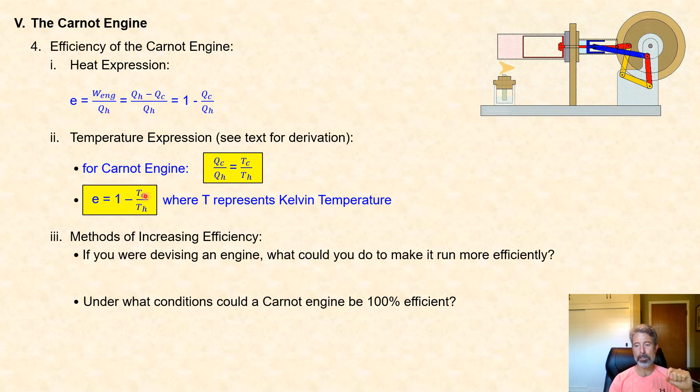So the laws of thermodynamics tell us we have these limitations on the Carnot engine. So when you look at this, if you want to know what is the maximum efficiency you can get for a real heat engine, it's really determined by the operating temperatures of that heat engine. This ratio TC to T high, that tells the story, it tells it all. You can manipulate that ratio perhaps by your engine design, but that is going to ultimately limit how efficient your engine can be.

So let's take a look at a sample problem, one that would be like the type of problem you would get for a homework assignment. In this problem, we're told that a Carnot engine extracts 240 joules of heat from a high temperature reservoir during each cycle. It rejects 100 joules of heat to the low temperature reservoir at 15 degrees Celsius.

Okay, so first we want to find out how much work does the engine do in one cycle. Going back a few slides, we know that the work our system can do on the environment, the work the engine can do, is the difference between the heat that is absorbed and the heat that is expelled to the low temperature environment. We're given both of these in the problem: it absorbs 240 joules, expels 100 joules. 240 minus 100 is 140 joules of work done by our system on the environment.

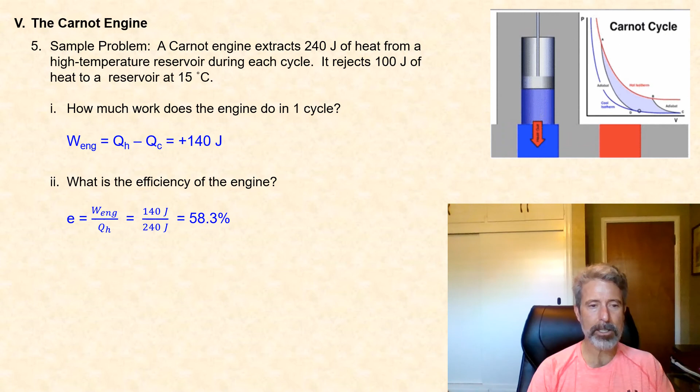What is the efficiency of the engine? In this problem we're given both Q high and Q cold, so we don't need to use the Carnot efficiency. We can just use what we know about the efficiency of any heat engine, which is calculated by finding the output work of the engine divided by Q high - what you get out divided by what you put in, which is the absorption of heat from the high temperature reservoir. When we look at that ratio, we get 58.3%. Notice that is still a lot less than 100%.

Not only is there never going to be a 100% efficient heat engine, but what we're saying is that when you operate this engine between the temperatures that must exist in this problem - and we don't know what they are, they're not given to us, but they are set by the description of this Carnot cycle - then for those unknown but definite temperatures, this engine can never be more than 58.3% efficient.

In the last part of the problem, we're asked to find the temperature of the hot reservoir. One of the ways of doing this is to use this ratio between heats and temperatures for the Carnot engine. When we use this and solve for T high, we know we're given Q high, the heat absorbed, is 240 joules. We know T cold, that's given to us in the problem - don't forget to convert it to Kelvin. And Q cold, the heat expelled to the low temperature reservoir, is 100 joules. We do the number crunching and we get 691 Kelvin.